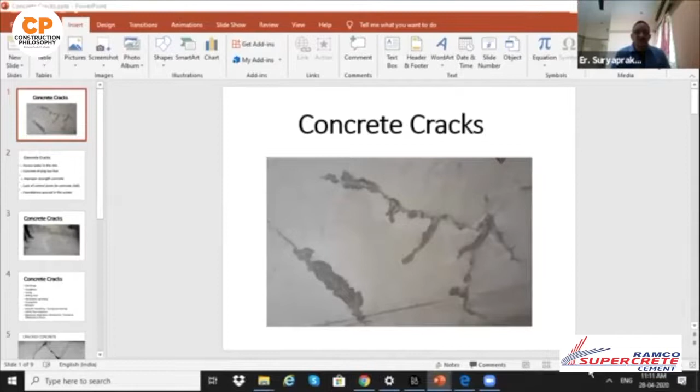Can you tell us how to classify it? Okay, I'll be sharing my screen and giving a small slide presentation for 2-3 minutes. As you can all see, cracks in concrete can be classified into two categories basically. One is non-structural, that is cracking due to bad concrete itself. So what we are seeing here is bad concrete cracking.

We can see on the screen. And other cracks in concrete are due to structural issues. I think today, because it's a huge subject by itself, we'll focus on concrete cracks by itself.

So the main reasons for cracks in concrete are excess water in the mix, that means the water cement ratio used is more than the design mix, and concrete drying too fast, due to dry climate or higher temperatures like summer in India, and improper strength concrete, meaning the concrete mix that is not complying with the design mix.

And then lack of control joints. Joints are provided in concrete because of the time taken for concreting. They're sometimes called cold joints, sometimes construction joints, sometimes working joints, and expansion joints, shrinkage joints. So many types of joints are there. And if we are not providing the required joints in concrete, that also can cause cracking, mostly in floors and large areas of concrete.

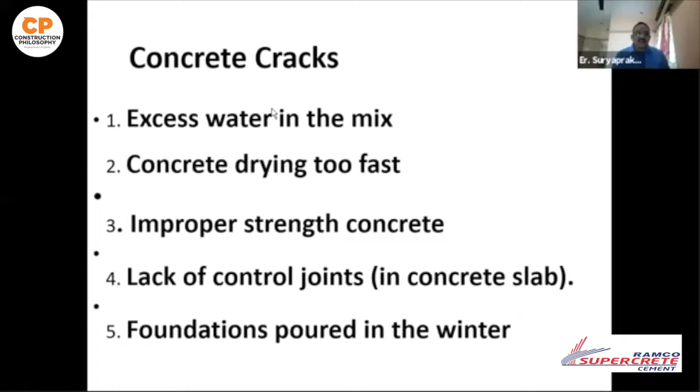Then foundations. Whenever we have foundations cast during winter, due to low temperature also, cracks can happen. So this is a crack being monitored. You can see on the screen the extent of the crack in the floor, and we will dig into the crack and see the depth of the crack and monitor its progress also. This is the flooring, you can see.

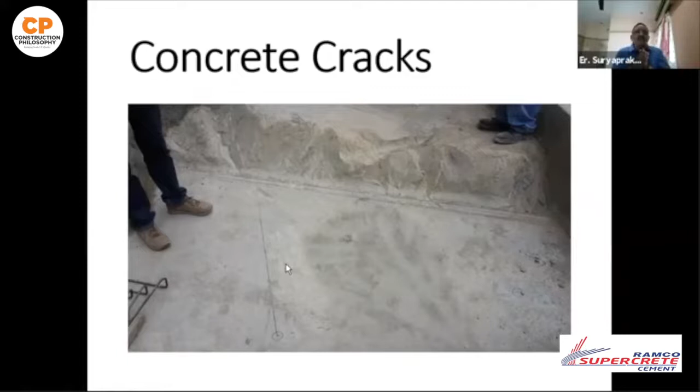So now the causes for cracks in concrete are mix design compliance, whether it is aggregate quality, aggregate source, or cement quality and cement source, and then curing period and the type of curing, setting time. This is a major cause actually, from what I have come across in the projects.

In ready-mix concrete from batching plants, whenever we use a retarder, if the design of the retarder is not adequate, initial setting can happen before we use the concrete, causing problems in workability and spreading. Even concrete compaction can cause problems if we don't properly compact, vibrate, or spread the concrete. Retarders are used in ready-mix concrete to delay the initial setting time.

Summer concreting is a major issue faced in dry climates, particularly in summer, when quick setting happens and shrinkage cracks start forming even before final setting occurs. The solution is to cover the concrete with an LDPE sheet as we pour it, so evaporation is controlled and proper setting happens.

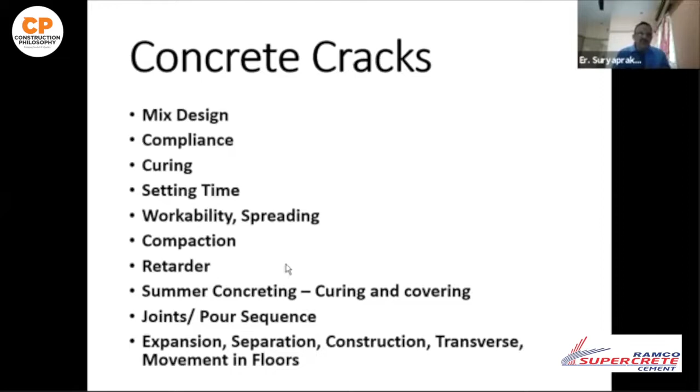So we have to allow movement in the bottom layer of the concrete by providing an LDPE sheet or a smooth surface. These are the main reasons, and concrete cracking can be disastrous if not properly managed.

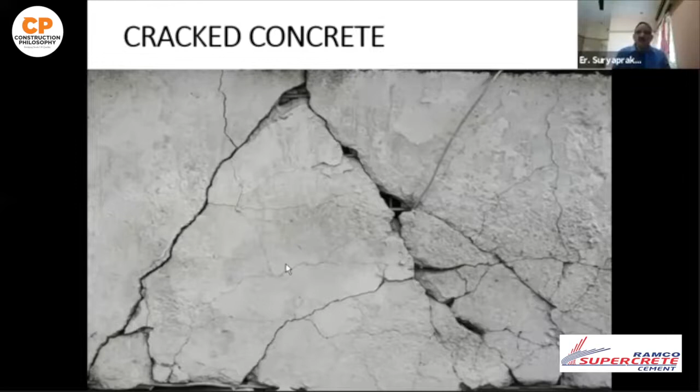This is an example of concrete where initial setting happened before the concrete was even poured.

Reasons other than the concrete itself include detailing issues. If reinforcement is not provided where required in mass concrete, particularly on all faces, problems occur. In one case, in a government project, all the laps in a column were provided at the same level, and when de-shuttering happened, the whole concrete cracked in the column. This kind of cracking can also happen.

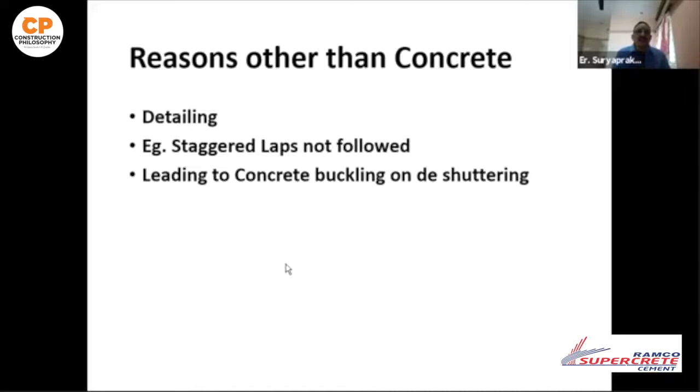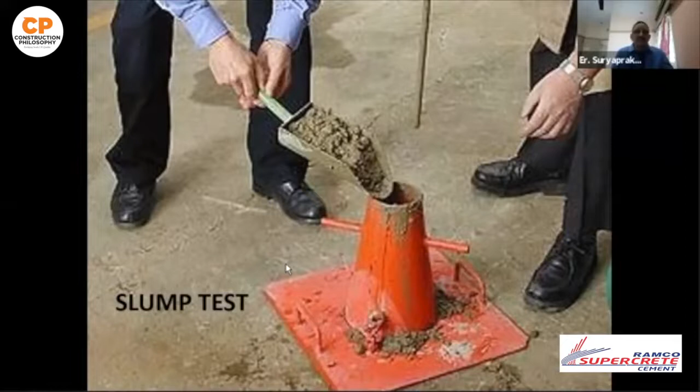Quality tests before and after placement are also very important for concrete, such as the slump test for workability, and the spread test in case we use a flow mix. These tests must be followed meticulously as per the code provisions.

So finally, quality assurance can avoid cracks, quality ingredients can avoid cracks, and quality workmanship can avoid cracks. More than all this, the engineer has to engineer - the engineer has to do engineering. This is the main thing. As we all know, concrete takes 28 days to attain its strength, about 40 days in total including preparation, aggregate procurement, and cement. So 40 days of production time is not a small thing, and it requires proper monitoring to get concrete that properly attains its strength and durability.

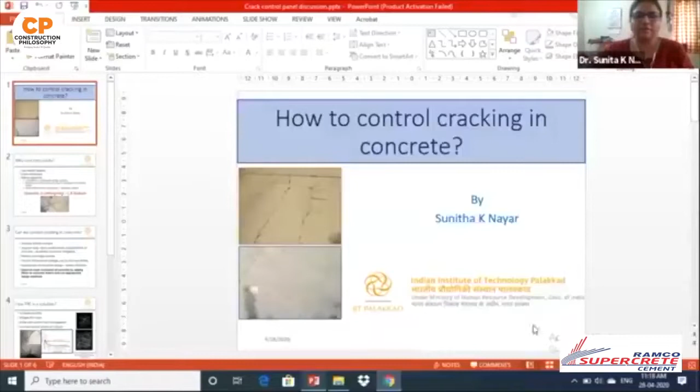Yeah, just let me share a small presentation that I have. I think that might help answering your query. I hope my presentation is visible.

Yes, yes. Good morning to one and all. I'm Sunitha, and I'm a faculty member at IIT Palakkad. My area of expertise is building materials and construction technology, and my research is specialized in high performance concrete.

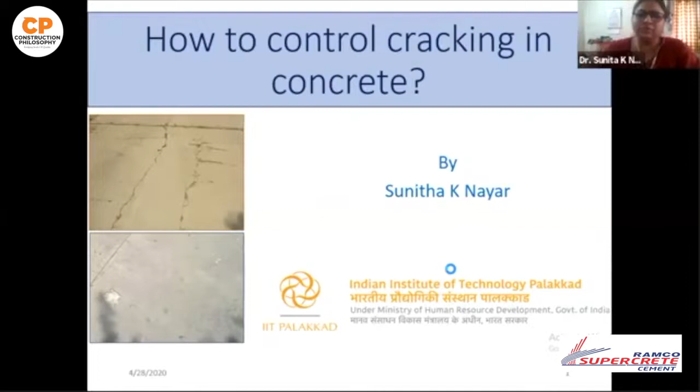Engineer Surya Prakash has set the platform clearly and well for discussion, because he has clearly described, from the construction point of view, the factors that contribute significantly to cracking. My role here is to contribute to the solution through research and academic findings, as Nebu mentioned. So from a materials perspective, most of the cracks are related to low tensile capacity.

I think I'm purely talking about what causes the manifestation of cracks in the material. I think it is related to the low tensile capacity and the inherent brittleness in concrete, which leads to the crack intolerance. Now, if you look at it from a materials perspective, all the factors that Engineer Surya Prakash has said, if we convert it into a material concept, what can we attribute these cracks to?

One is, of course, the inadequate design capacity, which is the load effects. The other one would be the long-term performance characteristic, that is due to restriction to free movement due to dimensional instability. And I think one major factor we have to consider is the deterioration mechanisms - that is, whatever crack is caused due to durability related issues.

So if we see in detail, this is one sentence that, if you all know Dr. Kadiyali, he always used to say, concrete is unforgiving. What he means is that if you make a mistake and the crack comes, then it's very difficult to cover it up. So you have to start thinking about this before you lay the concrete. I think that's what Engineer Surya Prakash sir was also emphasizing, the quality control.

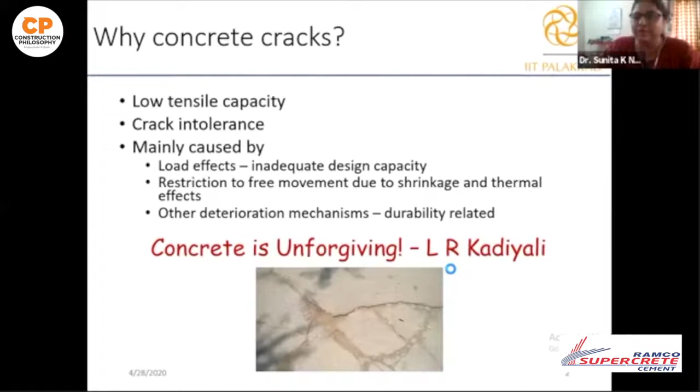So let us see from the materials point of view, what can be done to improve the cracking characteristics in concrete? As I said, it's directly or indirectly related to the tensile characteristics. So one strategy would be to improve the tensile strength. This is something we are all trying to do, but it's not always practically possible, increasing the tensile strength, because Mr. Anil will be able to tell what is the restriction in this possibility of increasing tensile strength with respect to our binders.

The other would be to improve the long-term performance characteristics of concrete - the characteristics that will improve durability, or address one of the major causes of cracking, which is corrosion, and how to mitigate this corrosion. If you can do this, the long-term performance of concrete can be improved. And then all the cracks that are related to these characteristics, which may be due to chemical attack, acid attack, or corrosion, can be mitigated.

The other strategy would be to reduce the stresses itself, such as reducing shrinkage stress using shrinkage reducing admixtures, or controlling dimensional changes due to thermal effects. This is something like neutralizing curling completely, or reducing the temperature difference in the concrete, reducing the stresses due to temperature difference in concrete. So many strategies can be adopted from the material point of view.

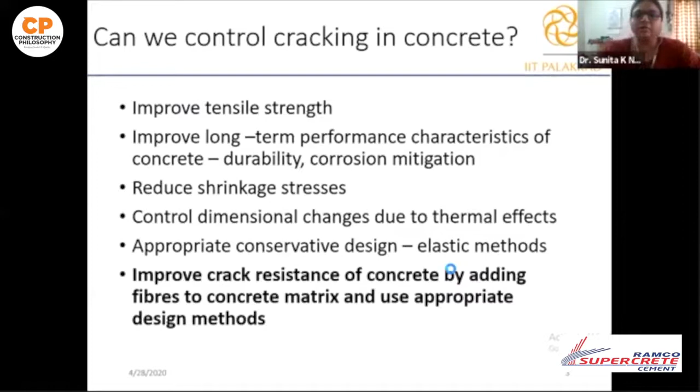Similarly, can we adopt a strategy so that concrete itself has some characteristics so that the crack does not occur? Or you improve the crack resistance of concrete by improving its crack performance. And for this, one option - not the only one, this is not exhaustive - one option is to add fibers to the concrete matrix, because what fibers do is improve the crack performance.

What it does is essentially the fibers bridge the crack. It does not mean the cracks will not happen, but even if it occurs, the cracking would be very limited in its crack widths, because the fibers increase ductility, delay and control crack propagation, and increase the tensile strains at rupture. All this is because of the post-cracking characteristic, which is demonstrated in the load deflection curve here.

This is how fibers are distributed in the concrete matrix, so that in any direction a crack occurs, a fiber will be encountered and it prevents cracking.

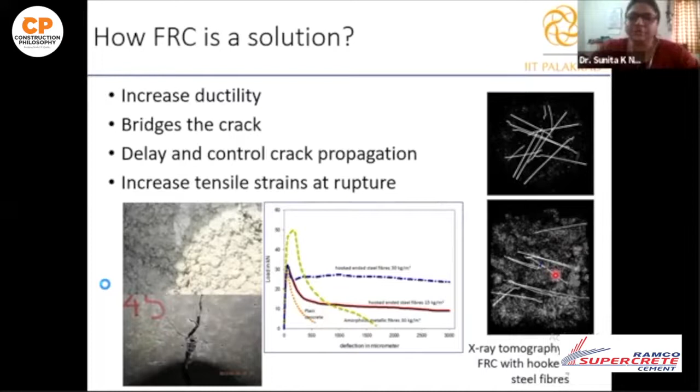Let me show you one example where two adjacent road pavements are laid at the same site. This is plain concrete and this is FRC concrete. Now you can see there is a crack, and even in the FRC you can see a crack. It's almost the same age, but the crack width is so minor that it does not affect the serviceability at all. So this is also possible.

This is imparting an inherent cracking resistance capacity to concrete. This is one of the strategies that you can adopt. I think Dr. Elson will be talking a lot about the durability and long-term performance characteristics that you can improve in concrete. That's what I have from my side.

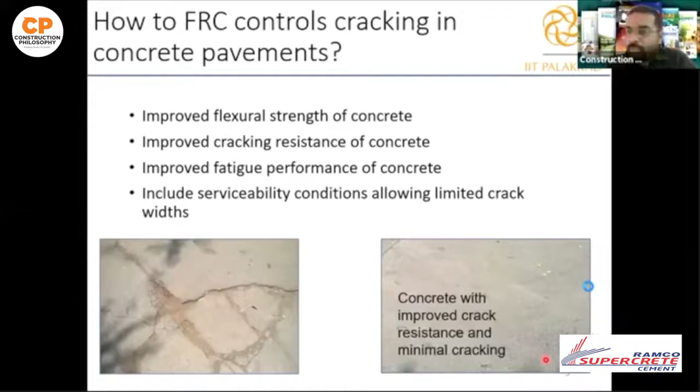Dr. Elson, these days the technology of manufacturing concrete has drastically improved, and the term specific or special concrete has emerged in recent times. So how do you identify the need for, or the choice of, special or specific concrete?

Thank you, Nebu. Sunita and Surya Prakash were talking about the cracks and the remedies for that. So to address this question, when we talk about special concrete, we should understand what are the reasons for cracking in concrete, and where and when it occurs. That is very important, so I'll also have a small presentation.

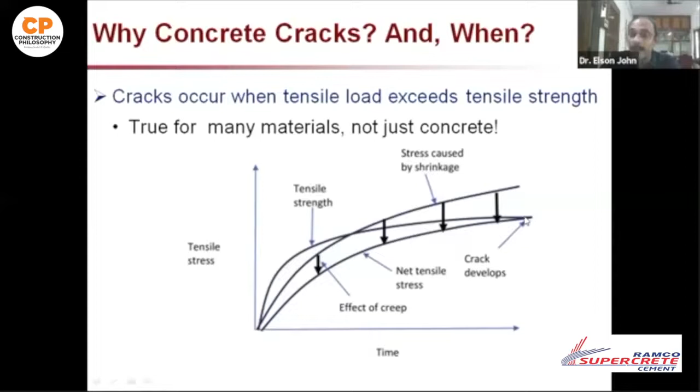If you look at the tensile strength, concrete has a certain tensile strength. The creep and shrinkage, everything adds up, and the net tensile stress in the concrete goes up. So when it becomes equal to or exceeds the tensile capacity of the concrete, the crack starts. So why does concrete crack, and when?

That's again a question. Concrete starts cracking when it's just finished and stiffening starts - that means plastic shrinkage cracks just before the final set. There can be disturbance, crazing, etc. within a few days after setting, or it can happen several years after setting, like corrosion, shrinkage, and so on. We'll see the different types of cracks. Even some cracks can occur at a much later stage, even after decades.

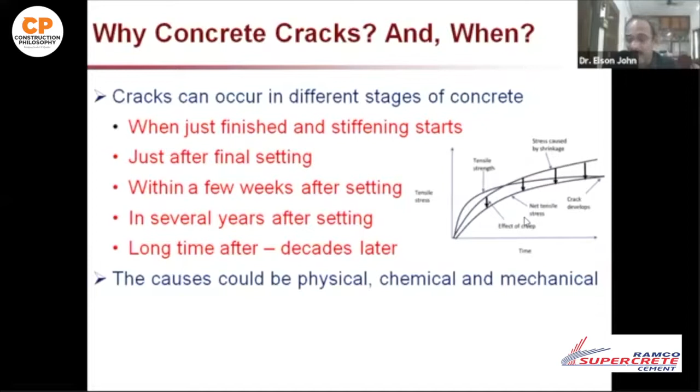The time depends upon the quality of the concrete, the exposure conditions, the ingredients of the concrete, and lots of other parameters. So the causes could be physical, chemical, or mechanical. If we classify the cracks in concrete, broadly we can classify them into two: one is structural cracks, and the other is cracks due to material problems.

So we can start from the beginning. The cracks can occur before hardening of the concrete itself, in the plastic stage. The main problems are plastic shrinkage cracks and plastic settlement cracks. I'll show you how it occurs. There's also the possibility of formwork movement while moving the formwork, or settlement of the supports. For slabs on grade, there can be subgrade movement too, which can lead to cracking in concrete.

After hardening, there are many reasons for concrete to crack. One is the physical reason - drying shrinkage of the concrete, due to evaporation or removal of water from the concrete, and that can be a structural crack in most cases, even though it happens at the material level.

Then there's crazing of concrete, and chemical reasons for cracks to occur - corrosion of the reinforcement, alkali aggregate reactions, cement carbonation. There are other chemical reactions too, like sulfate attack, chloride attack, etc., but those don't always make cracks in concrete. Sometimes sulfate attack may come, but that will disintegrate the concrete. So I'm concentrating here on the cracking.

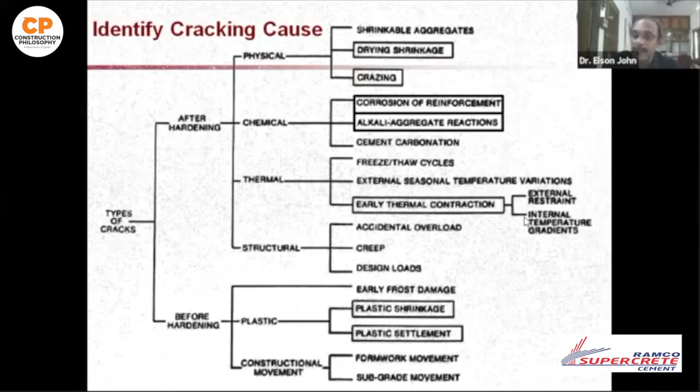Then there can be thermal reasons for the cracks. One is freeze-thaw cycles, so in cold regions freeze-thaw can lead to cracking. Then thermal contraction and expansion, and early thermal contraction cracks. In addition, there are structural reasons: accidental overload like fire, earthquake, creep, and then the design loads.

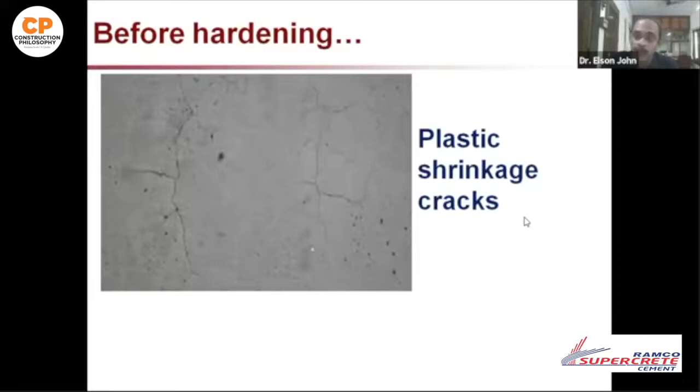So let us see some of the types of cracks and how they occur. Plastic shrinkage cracks can start within few minutes after the concrete is placed and go up to the initiation of hardening, few hours. So we can see the plastic settlement cracks.

In the first stage, concrete is saturated, so the water will bleed out to the top, and the solid materials will have a tendency to come down. So all the other parts, except over the reinforcement, the material is free to settle down. Above the reinforcement, tensile stresses develop, and you can see the cracks.

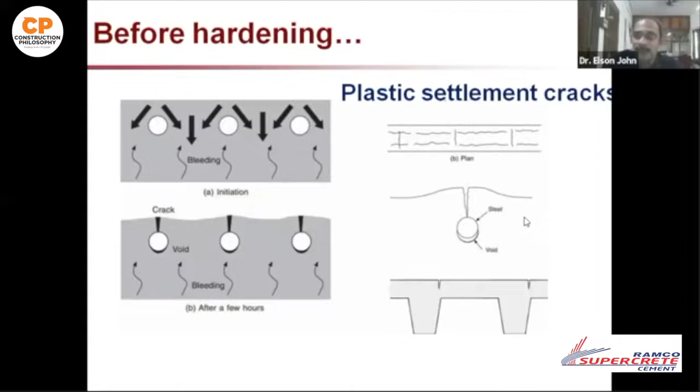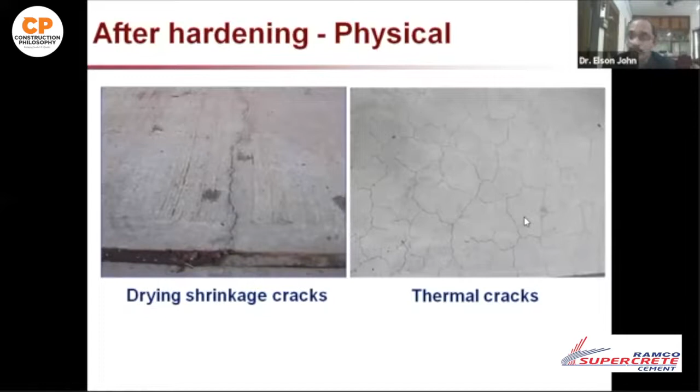Then subgrade changes, then drying shrinkage, that's the removal of water from the pores in the concrete. Then thermal effects, especially for mass structures, the inside temperature in the concrete will be high, while the surface is exposed to atmosphere, so there will be a temperature gradient, and that can lead to cracking.

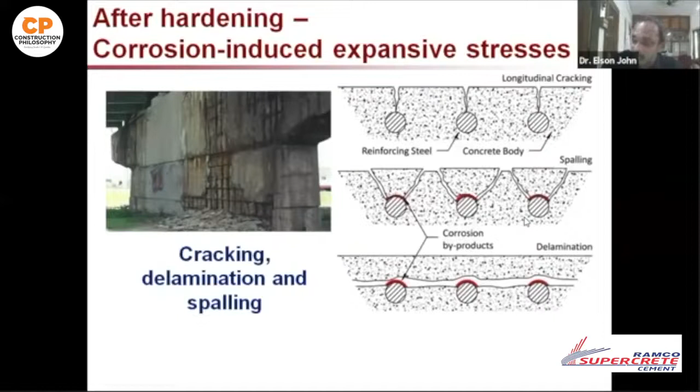Then sulfate attack, alkali aggregate reaction, you can see map-like cracking in the structure. Again, corrosion of the reinforcement: when the reinforced steel corrodes, its volume expands, that exerts pressure on the concrete, leading to cracks and spalling. Also freeze-thaw resistance and thermal cracks. This is a very interesting figure.

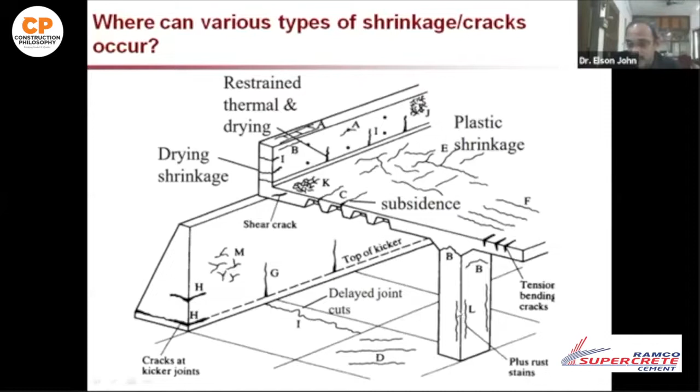We can have the alkali-silica aggregate cracks, drying shrinkage cracks, and cracks due to corrosion of reinforcement. It's a very big topic, so I'm not going into much detail on that.

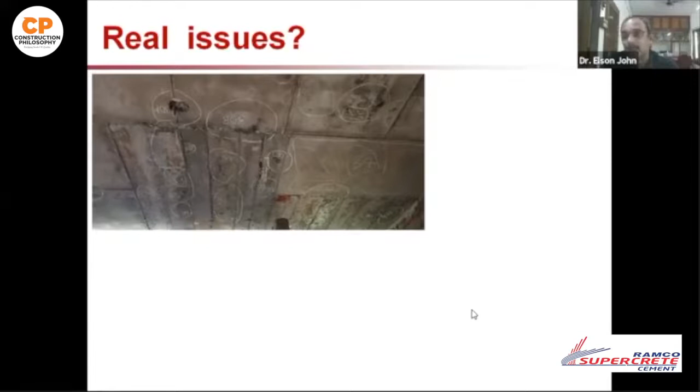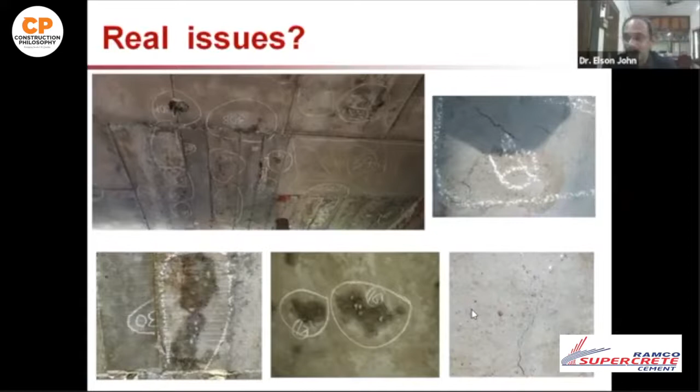Mainly because of disturbance and plastic shrinkage cracks, some of the cracks are extending through the concrete, and you can see water percolating along the crack lines into the affected areas. So cracks are a usual issue—crack is like a cancer in our concrete. If we can find out and repair it at a proper time, we can extend the service life of the structure, otherwise it is very dangerous. So always prevention is better than cure.

With this, each time we have to address it when talking about special concrete, different types of concrete. For initial stages, we have to reduce the temperature, so we have lots of admixtures to address this—mineral admixtures as well as chemical admixtures. But each case should be addressed properly.

Generally the cracks are not seriously taken and it is ignored, most likely covered with plaster or paint or something. So it's advisable to always have an expert opinion when you find a crack, even if it is small or big.

Mr. Anil Pillai, the cement industry has now introduced many special kinds of cement, like quick setting or sulfate resistant, or many different types of cement with different characteristics. Do you have a product specifically for reducing cracks?

Good morning to all of you. Most of you have covered the real reasons of cracks, and it is very difficult to be the last speaker when most of the reasons have already been covered. This particular word crack, in fact, when we use it in our daily terminology, it irritates many people, and it also gives sleepless nights to many civil engineers when it happens. So, as rightly pointed out by Dr. Elson, prevention is better than cure.